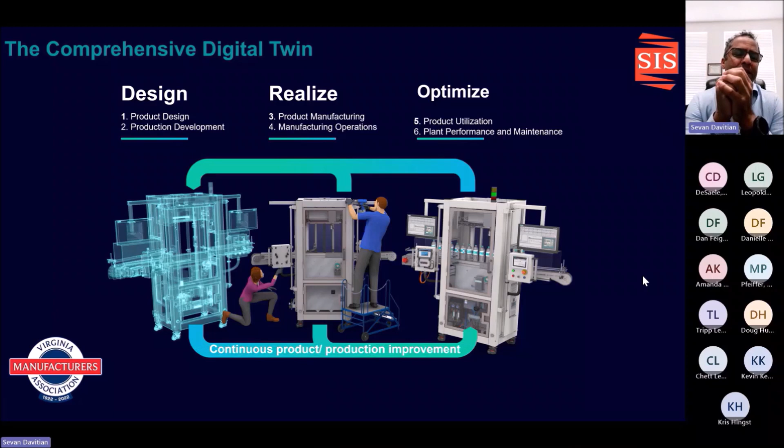And as you might hear down the road - we won't be talking about it much today - through Mendix, we're able to integrate everything into your business software, into your CAD, into your CAM, into everything. You're going to find that through the Siemens ecosystem, you're able to integrate everything together, making it very easy and very rapid to go to market with your product.

So here we're seeing a little bit of the process in an MBD environment. Our designers create, for instance, here we've got a private jet. In the designs and the individual parts of that private jet, we're adding our PMI.

And that product, as identified by that down arrow you can see there, would be our output - whether it's to our suppliers, to our OEM that we are creating product for, or to a manufacturing shop that is going to create the different parts for us.

Long gone are going to be the days of needing to have several GD&T experts on staff. Included in the ecosystem and with MBD in NX is the PMI advisor. And I'm going to step back a minute and mention something very important.

MBD is not just a Siemens thing. MBD is being driven by the Department of Defense, by the OEMs, by the automotive industry, and within the Siemens portfolio, we're able to import and use PMI and model-based definition from any system. I think it's important to mention that within the Siemens ecosystem, we can use and leverage everyone's PMI.

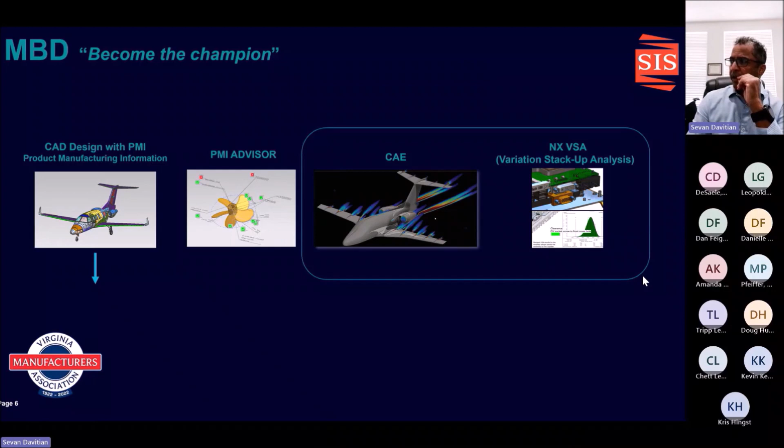And then, of course, my real favorite, having been an application engineer for a CMM company - my favorite application where the PMI is leveraged for free is in programming a CMM. You're going to see part of that in a little demo video we have of how quickly you can go from just your CAD model to having a complete CMM program.

Here what we're seeing is a 3D PDF from NX with the TDP bundle, the technical data package. You're essentially going from your CAD model and CAD views into what you're seeing on the right-hand side here. This is actually an image I took out of Adobe Acrobat of a 3D PDF that NX outputs.

You can see on this bottom row here - hopefully you can see my mouse arrow - in NX we organize your PMI into views, similar to how you would have had them on a 2D drawing. You'll have different views with the information that is needed, like MBD datums, MBD front, MBD general, and you can name those any way you want. All of your information is in these views.

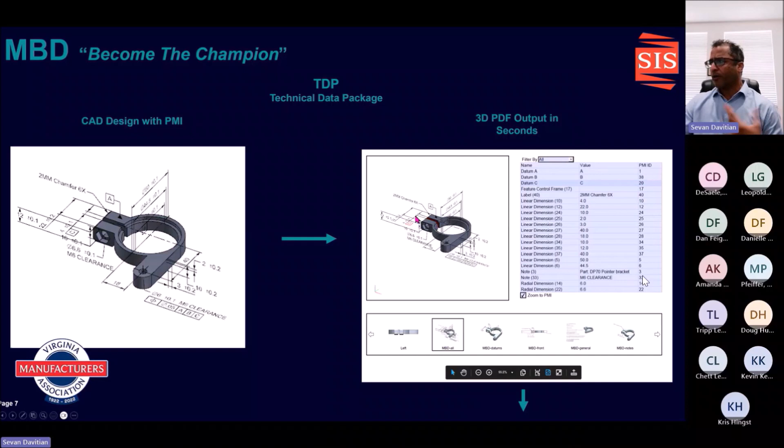For you guys that may be in the naval industry, or where your vehicle or product is huge, this zoom to PMI button is worth its weight in gold. I was working on an aircraft project once, and I had to literally dig around to find datum A, datum B, datum C. Those days are gone - just click zoom to PMI, go into your list, select the datum, and it'll quickly zoom to exactly where that datum is, or exactly where that dimension is, or exactly where that feature control frame is. It will highlight it in red, as you can kind of see here. From there, you can zoom out and quickly identify where it is.

Okay, so here, what I'm showing you is what might happen creating this propeller. We receive, and I'm going to pretend that I'm a machine shop creating this propeller for some shipbuilder or OEM. Essentially, I've received the CAD file with PMI, whether from NX or from, the PMI is essentially CAD neutral, and so we're able to bring it in.

In this case, we've got our CAD file, and through an application called Staged Modeling, I can take somebody, with half a day's training, I can get a process engineer with no NX training to go from the finished product, as we're seeing in the CAD with PMI image here, and quickly remove features so as to wind up with the as-cast or as-forged propeller.

And create notes and manufacturing processes, in either direction, either starting with the finished product, going back to cast, or cast and going back. As you're going to see in every function in NX that leverages your PMI, there's going to be a button called Reuse PMI, which essentially is just leveraging the work that the OEM or the designer has put in without having to recopy it and recreate it.

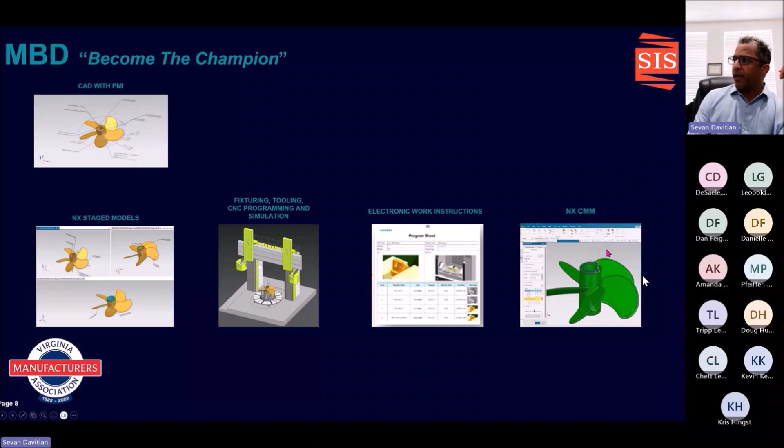And my pride and joy, NX CMM, where literally in 15, 20 seconds, you're automatically creating a CNC or DCC, if you're a CMM person, a program with the probe angles, your A and B angles automatically created based on the PMI and the features associated with the PMI. So yes, perfect transition.

Here's our Reuse PMI button, and you're going to see that everywhere throughout the ecosystem. So here I'm showing you the staged models functionality that we're just talking about. The first thing that would happen when I start from scratch is I'm going to say link geometry, and I'm going to inherit not only the CAD model, but then I can choose which PMI I want to use and which is necessary for those features.

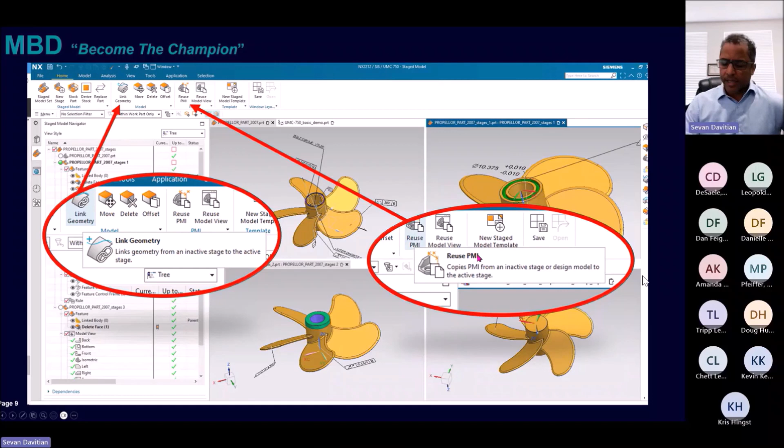As I go through the stages, in this case, because I was delivered a finished propeller model, I went through and selected the PMI that I needed, and then I go through the stages of creating the different operations. So I go from the finished to, let's say, op 30 to op 20 and to op 10, which might be just qualifying the face of the propeller. As you're going to see, the reuse PMI is the golden button, which allows us to reuse everything.

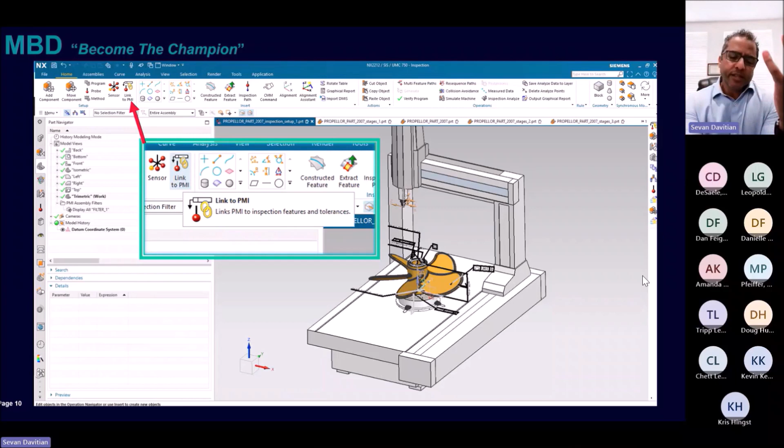In the case of the CMM, again, the button happens to be called Link to PMI. Essentially what you're doing here is you are linking your CMM program to the different dimensions and tolerances. So you would hit that Link PMI button.

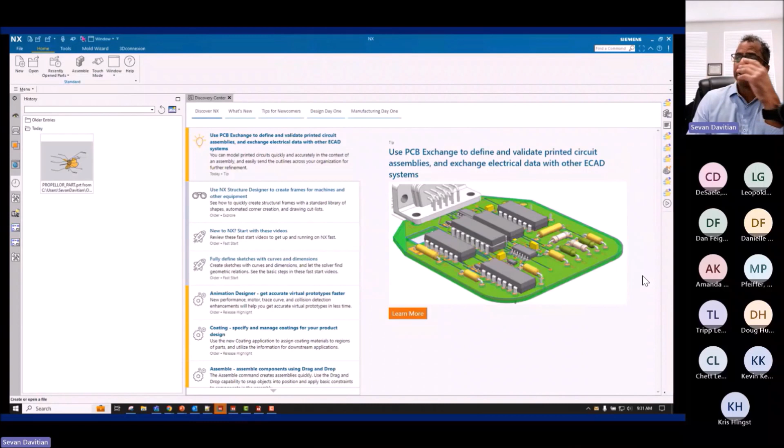And as you're going to see, I'll introduce you a little bit to what you're going to be seeing in this demo video that I'm going to start here. But as I mentioned earlier on, you're going to organize your PMI in views, which many of you may have seen and are familiar with. We organize them however makes sense for you, whether it can be in front view, side view, detail view, and all of those things.

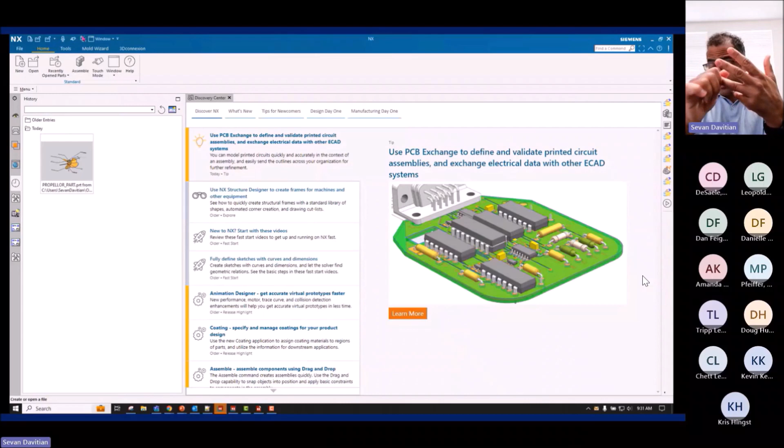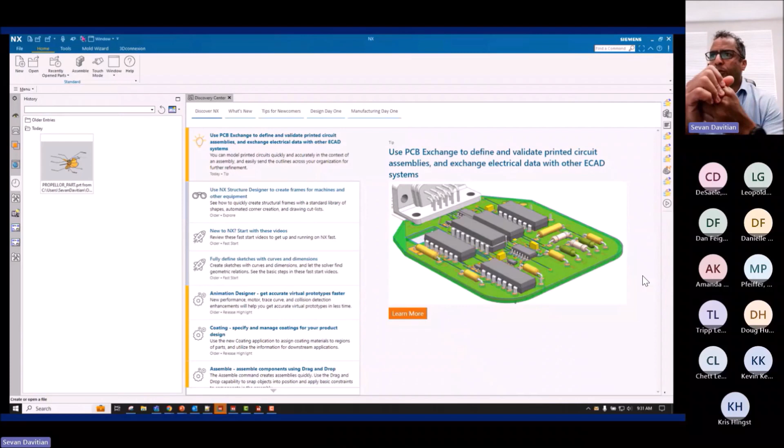And so then similarly, whether we are doing a VSA, a stack-up analysis, or whether we're creating a CMM program, or whether we're creating a CNC program, if I'm looking at the high pressure side of a propeller, I would select that view and I would probably be grabbing dimensions from there.

So as you're going to see here, I'll start this video and talk us through it. I'm going to go ahead and open this propeller part. In the beginning here, you're going to see we've got all of our PMI, and this view here in particular happens to have everything. But as I scroll through here, I'm just showing you that the PMI is organized by views.

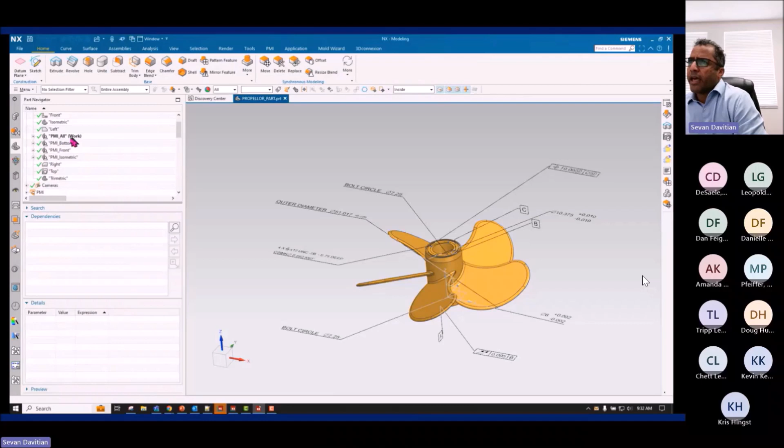And well, your PMI, you saw it first. You can list and show it all by PMI. And then here, actually, we're going through and I'm showing you the different views and how you might have different dimensions shown and isolated.

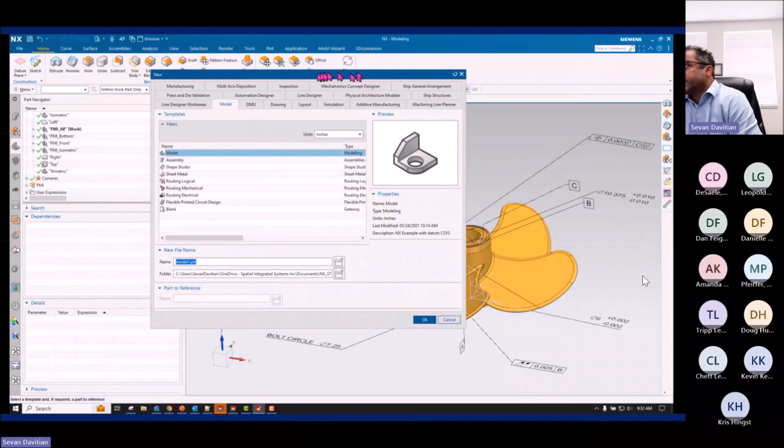Then at this step, we're going to go ahead and create a new CMM program. Similarly, I'm going to show you how you can go and select the views. Maybe there's so many dimensions in your product that you don't want to look at all of the PMI.

So here, now that we've created this new CMM program, in the process, I chose which CMM I wanted to use. And as you'll see, we're going to also simulate the machine so we can make sure that we don't have any crashes. Usually 60 to 70% of the cost of a CMM is in the head of the machine with our, whether you have a Renishaw probe or whichever brand probe.

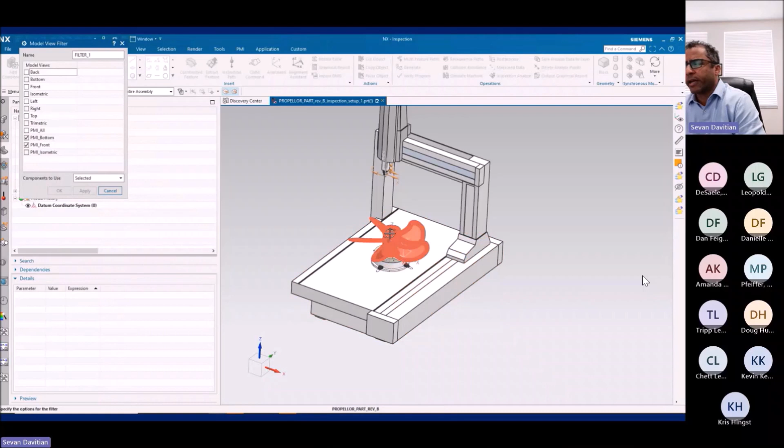So we want to make sure there's no collision. Here I'm filtering the dimensions that I want to bring from which views in the product. So even if I'm the CMM programmer and I'm not familiar with the product itself, via company standards, I'll be able to see and select the views I want to use, depending on the orientation of my part.

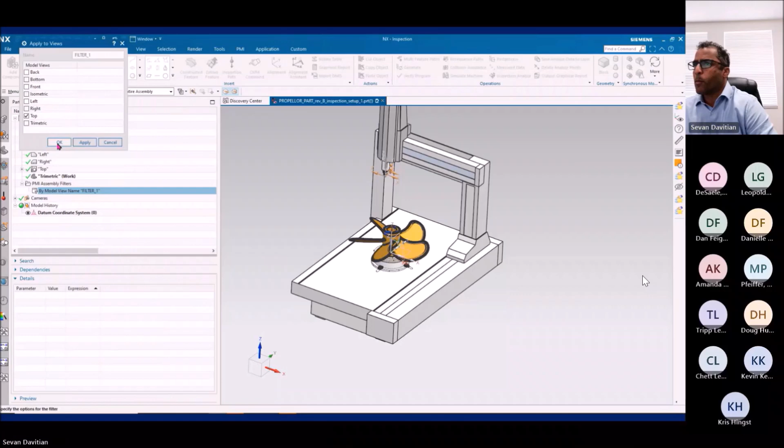Okay, so now we've got the information showing that we want.

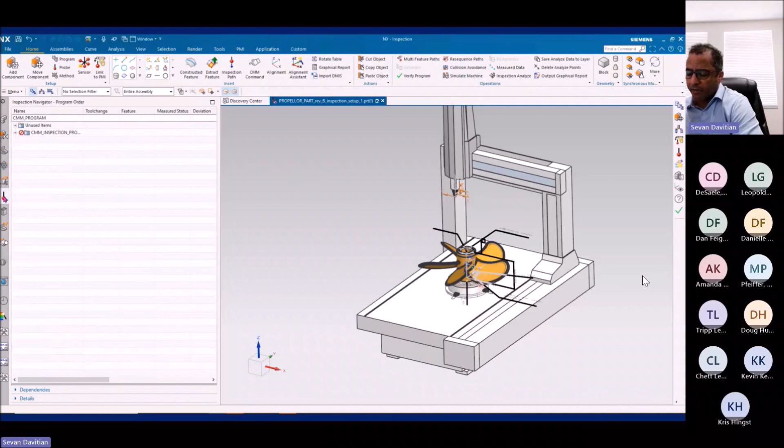By hitting the link to PMI and create paths, and I said yes, you'll see that in 15 to 20 seconds we've created not only the CMM program, but transferred all the tolerances into the report. So long gone are the days of the CMM programmer having to look at the drawing and add tolerances manually.

All of that just happened automatically in that amount of time. Let me rewind real quick. So here I'm selecting the program and I hit the generate button. It happened so quickly we essentially missed it. But right here I right click and select generate, and now simulate.

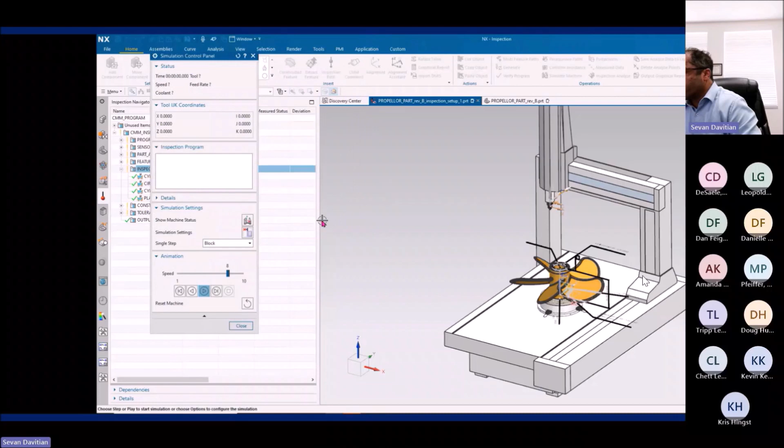At this point, what you're going to see, I want to make sure, for the sake of the video, I made sure the propeller was oriented in a way that might collide. And just to show that, we're going to detect a collision and see how quickly we can go from this program where the propeller is oriented in this direction.

I'm going to rotate it, we've got 5 blades, so I'm going to rotate it about 36 degrees and regenerate the program.

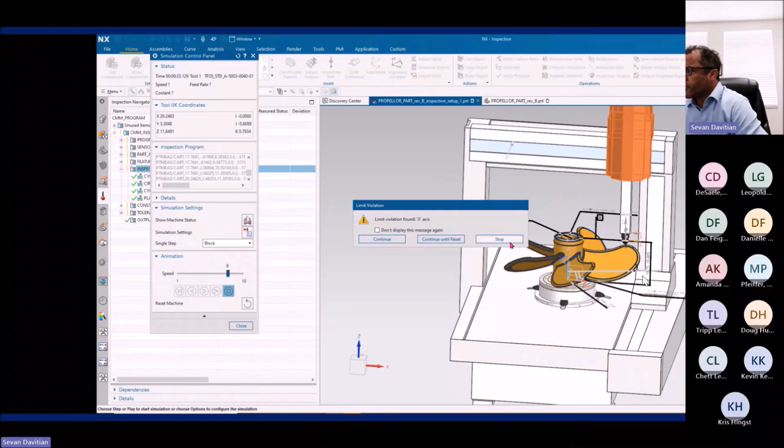In the time of this video, not only did we add all the dimensions, we created the report adding all the tolerances, but we also programmed the CMM with the A and B probe angles and simulated it. We realized we have a collision, then rotated the part, which of course means we have to regenerate the program, as you just saw in that last click.

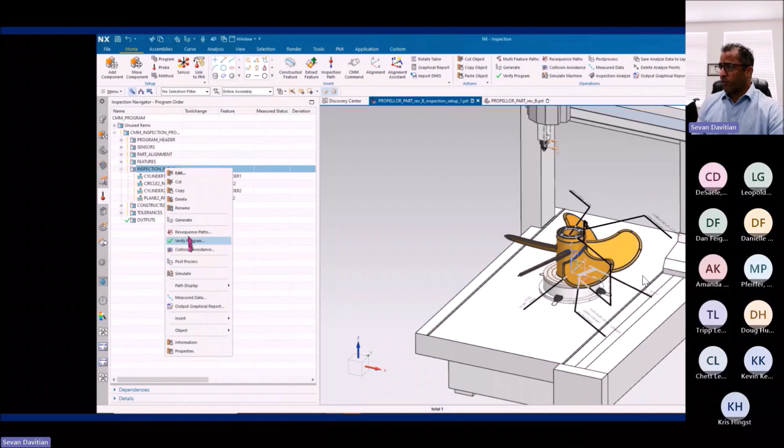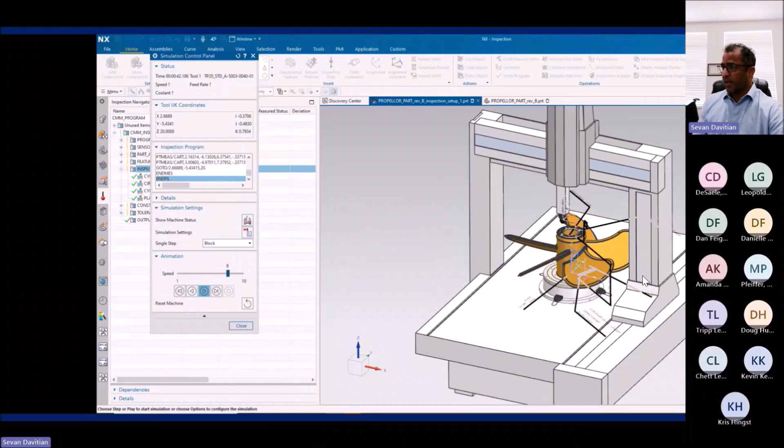I've regenerated the program with the part oriented differently, and we'll run it again. Of course, if you're a metrology person, you know my AB angles had to change again once I reoriented the part because my surface normals changed. So in that time, it also reoriented the AB probe angles.

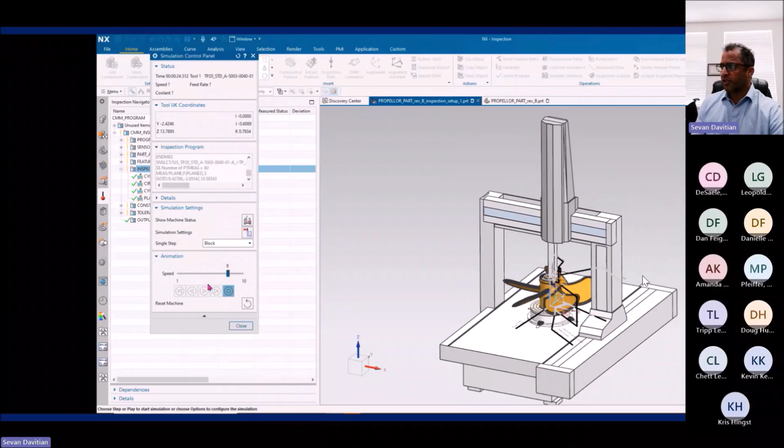In this case, I want to get the CMM closer to the root. I want to check points, say a surface tolerance across that particular blade. So I went ahead and edited my A angle to rotate the probe so I could get closer to the hub without that collision. And you can see we made it through that portion of the inspection.

And we can carry on to measure all of the holes and everything. Done. So essentially what you just saw is the speed in which—I think this video is like 3 minutes or so—4 minutes and change. So in under 4 minutes, we created our CMM program.

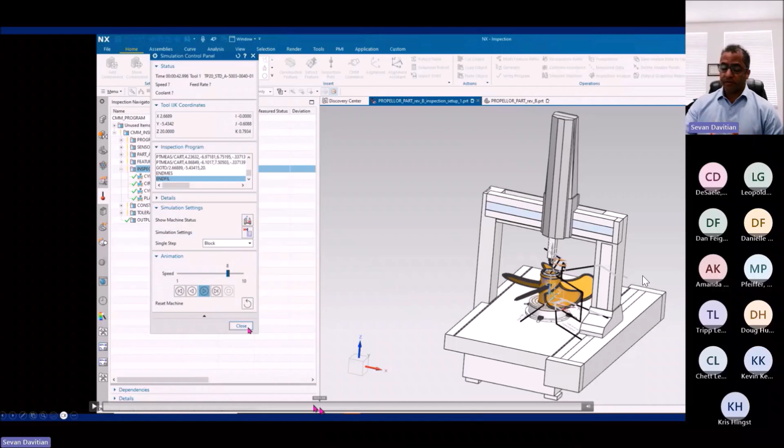We created and populated our report, redid the program and reoriented the part, leveraging the power of MBD to do all of that.

And that is why in all of these industries, whether you are the OEM supplying your product information using PMI and MBD, or a supplier, manufacturer, or sub-design group helping put things together, you'll find that in the marine industry, in aerospace and defense, in automotive and transportation, in all of these different businesses, the future is in leveraging MBD to increase your productivity.

So what you've seen in this quick demonstration is that your engineering team creates this PMI, this model-based definition and product data. Instead of them having to create a drawing, the machine shop having to look at that drawing, analyze it, and decide what tools to use...

Your engineering team that is checking to make sure all of your assemblies are going to go together, with no loose fits, your quality people, they're going to take that original data and reuse it. You don't have to have staff continuously converting from a 2D drawing into the next phase, whether it be CMM or stack up analysis—all of these things.

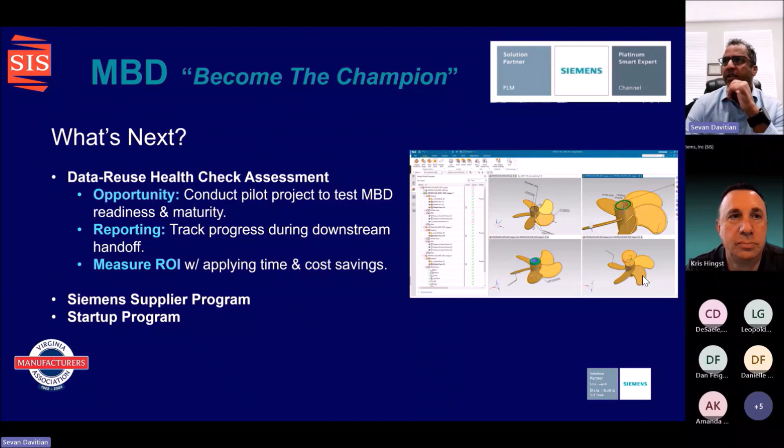And there's lots of different ways that we can help you. If you're an existing customer, there are things we can do. If you're new and you want to get in through a Siemens Supplier program or a startup program, there are lots of ways we can help you get on board. I'm more on the technical side, and I can help you figure out what you need to do, and then our guys like Kris, Chett, Greg, and everyone can help you as far as identifying whether you qualify for an A&D discount or a supplier program, or one of the tons of ways we can help you get started on your journey.

I think we actually went through this fairly efficiently. We did. And so if there are any questions, we can have a Q&A session right now, but I would really encourage you, after this call, to take some time and think about things.

I'm going to go ahead and send Kris that 3D PDF so we can share it with everyone, so you can work in there and see what you think as far as rotating the model. I didn't mention this, but the 3D PDF is kind of like a zip file. In this 3D PDF, you can add text notes, you can add a CAD model. Essentially, you're sending one file, and that file can have everything that your OEM or your machine shop or anyone could possibly need to manufacture your product.

I do encourage you to open the PDF and take a look at it. The 3D PDF can contain step files, CSV files, or others, all within the PDF.

Yes, absolutely. Essentially, when you in NX go to create a 3D PDF, you're provided with a window with 3 tabs. In the first tab, you determine the template you want to use to create your 3D PDF. In that window, you can select whether you want security, so we can password protect the 3D PDF so that only people with the password can have access to it.